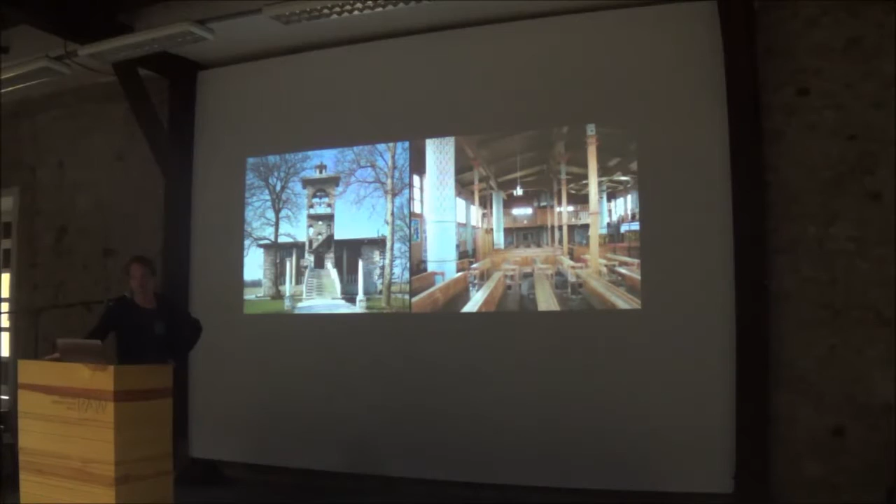So nevertheless, in the golden era of modernism, I'd say this was a very brave act on his part. We can see, for instance, one church with a very limited budget, and the most well-known work, the National University Library.

As you can see, a very interesting texture on the facade. Also, for instance, the pavement—he picked stones from all around the construction site and incorporated them into the pavement. The other thing is he designed everything, from the exterior to the last detail of each house and interior. As you can see here, the main library reading hall, the chandelier—everything was designed by him down to the last knob.

Just a bit more history: we became independent in '91. After this, especially the young generation of architects had some luck that we could enter—there were a lot of competitions. So we had some luck to enter and to start working together with some older architects. Also, when a new country is established, it needs all the infrastructure, administration and institutions important to lead the country.

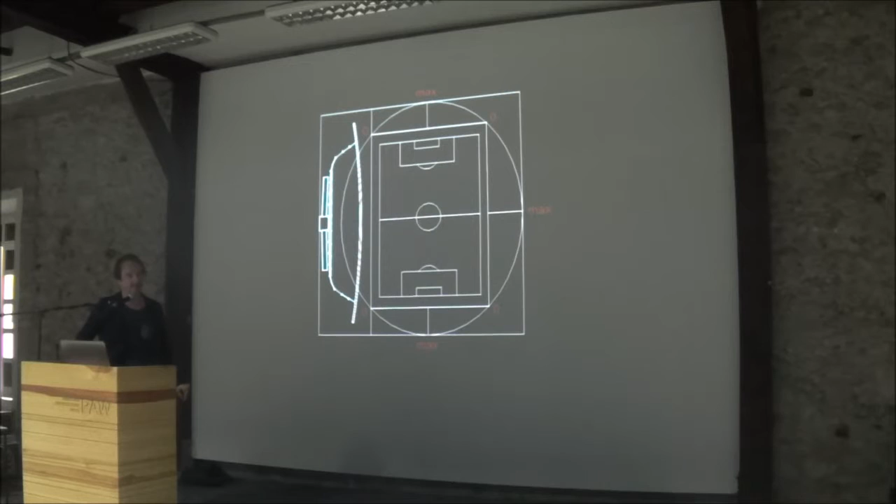So basically this first sketch also became the physical design of the stadium. We started with very pragmatic points, positioning maximum points of seats in the middle of both sides of the stadium, with the corners left without. The next step was that we positioned all the additional program on the base.

With natural architectural elements, we already established a security zone - you probably know football better than me, that you have all these security zones you have to check, so you don't need additional fences.

We didn't even expect that this so-called balcony would also become a foyer of the stadium in between both parts of the match. You can see that they all got together here and talk about politics and I don't know what.

So the second thing inside, maybe I will just quickly mention, is the double transparent roof.

Because of this, our stadium needed really minimum additional lighting, because we kept, you can see here just one point, the existing columns with the lighting. So especially at night, already during the daytime you get this diffused light, but also during the night, during the match and in between, you don't need additional lights, because you get light through the diffused light from the existing lighting columns.

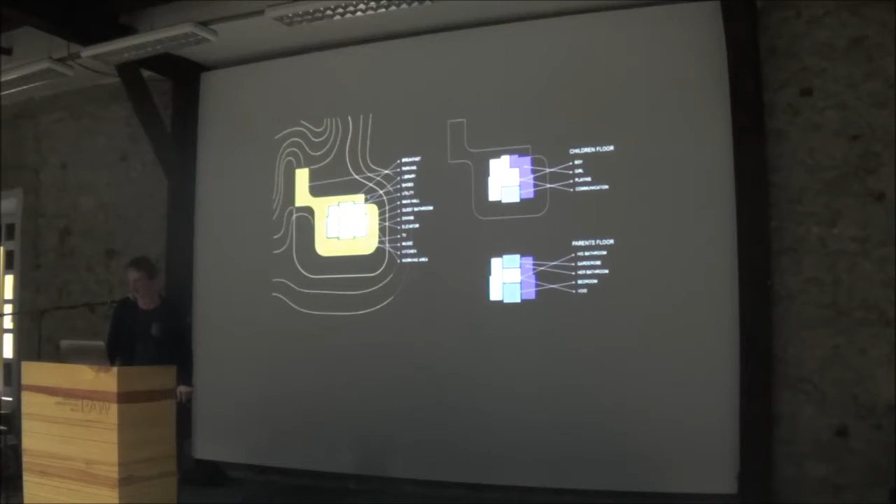All architects in practice know that private projects are quite essential and really interesting, because you have to talk, you have to enlighten the client. So when we started to talk about the staircase, which we said could be the main core of the house connecting both parts, they brought me this image, I don't know if you watched this Dynasty series, it was like really long movies.

Slowly we got to some spiraling staircase which is connecting, and also a visual element which you can see and be seen from all parts of the room. You can see the living room, the children's floor, and then upstairs the parents. So also the different levels of the terrain, we kind of stepped, elevated towards the living room, in between both the first floor and the ground floor.

All the interior is clad in wood, and the main elevation from the garden towards the entrance, you can see the stroke and the vertical connection where you enter this staircase.

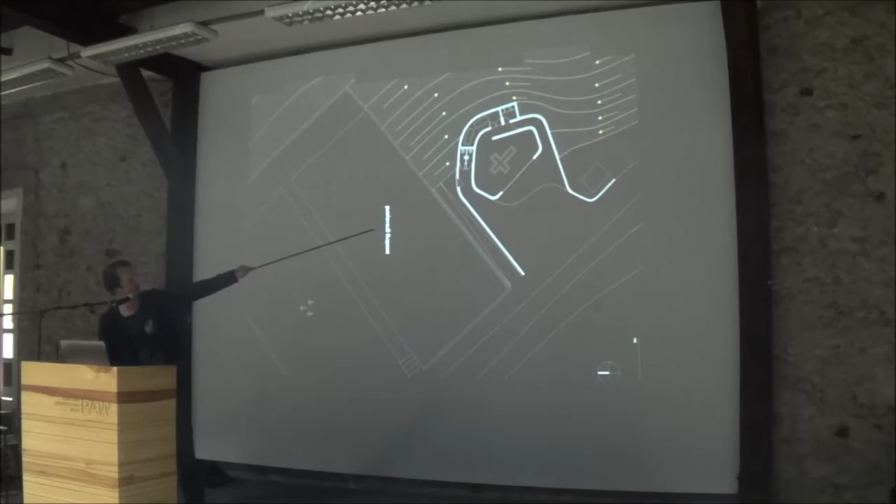So we made a flat roof, hid all the service spaces inside the existing trajectories, plus integrated the way the wall goes from the road to the existing graveyard, plus the square in front of the chapel, so that the memorial can also be held outside when it's warm, plus an ecological island behind this wall.

So you can see the ways of the trajectories, all the concrete shell, and the finished chapel. You can see this connection, the small interior, and the lighting during the night. The sides, both entrances from the sides, and the hidden ecological island.

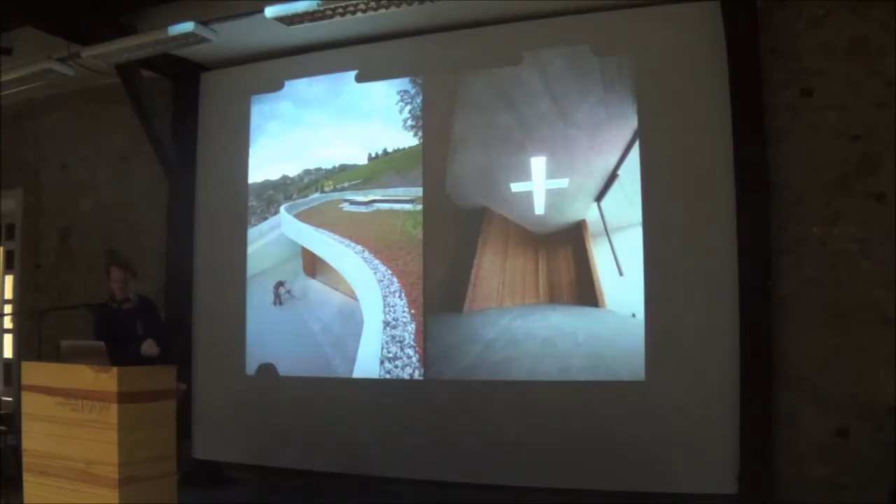And you can see from above that the chapel is integrated into the landscape, so it's on the same level as the existing graveyard, so it doesn't stick out. And still some imagery during construction, and the lighting from above, which travels all over the day.

It's a, let's say, quite more recent project, which first miracle was that it gathered four different Slovene offices to make one project.

The reasons were mostly economical, because they didn't have enough finance to have a proper competition. It was a very interesting task to do a museum for European space technologies, plus a communal space for village people in this small town, dedicated to one of the first rocket scientists from the beginning of the century. He was called Herman Potočnik Noordung, and he was one of, if not the first, scientist who started dealing with traveling through space while taking into consideration gravity.

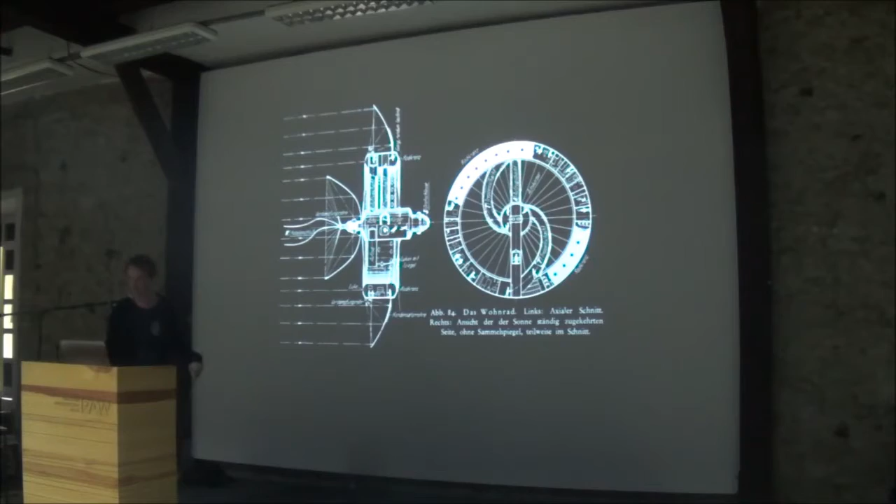He made these space wheel plans, so you can see the spaces and the power of gravity turning the wheel so it can travel through space. If you don't know this sketch, you surely know Stanley Kubrick's movie 2001: A Space Odyssey, which used his prototype to show it, and not just this one.

The museum dedicated to him was built because the mayor was very fascinated about my idea, since his mother lives there. The second option was Maribor, but they decided to do it here because they were really eager, and it was also funded around more than 60% with European Union funds.

Basically, very simply, we took a prototype and incorporated it into the space, and we wanted to have a feeling of dealing with gravity a bit when entering, and also when designing the spaces.

As you can see, the village also has a communal space, where an existing house was standing, so we had to incorporate that. The communal space was positioned in the core of the building, and all around we positioned the exhibition space. You can imagine the exhibition going all around, like maybe the Guggenheim on the ramp, so that you feel a bit more gravity when traveling from the core to the top of the building, which also has a sightseeing roof view.

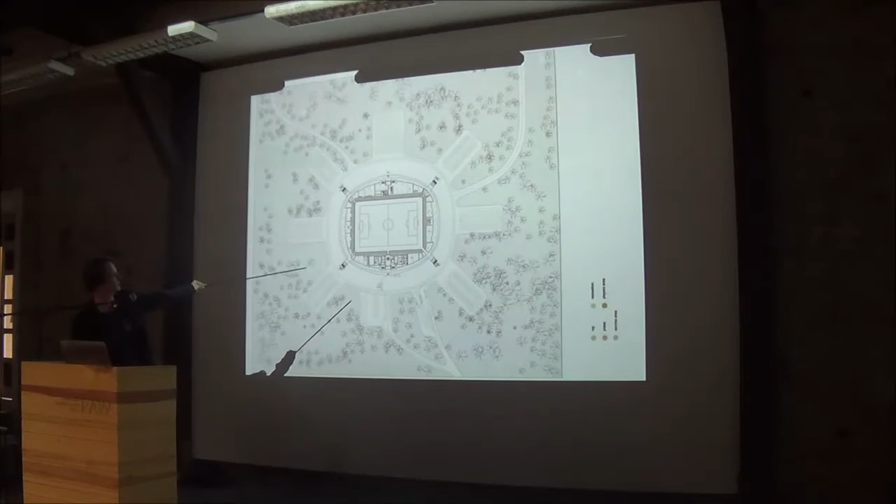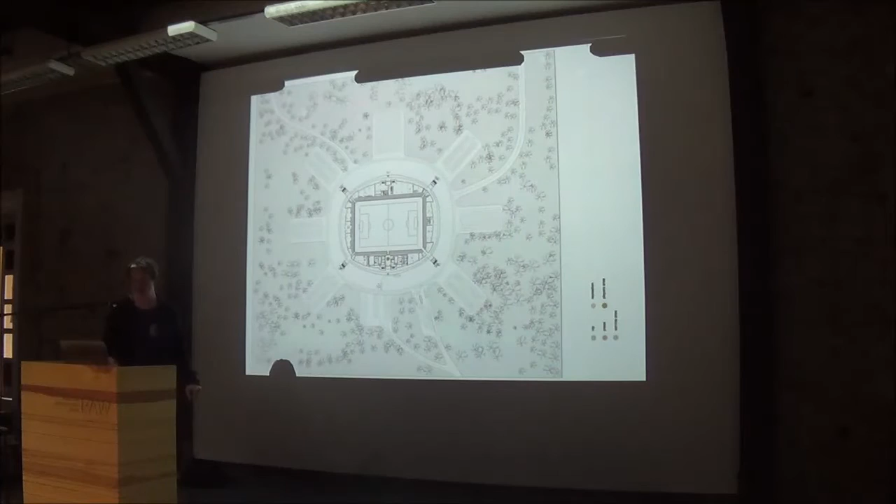So you can see this area. All the additional program for footballers, some additional fitness plus player zones, were placed on the base and ground floor. Then we made this envelope, and we started to do a lot of different tests of this envelope, how a roof becomes a facade, and how we make perforations according to different functions. So we got to this scheme.

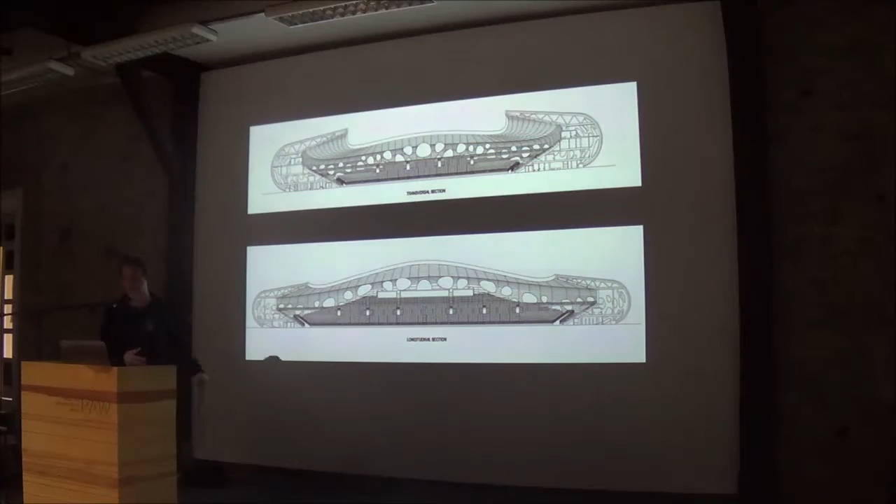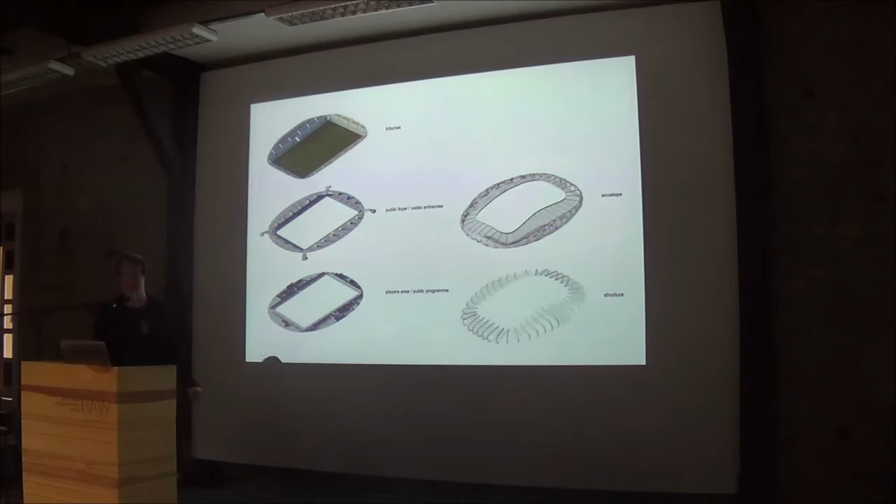We also did a lot of, let's say, economizing of the structure, because before, when we went to take shots with the photographer, we got to know this Borisov, where this stadium is placed, and it's really, I could say, from the 70s or 80s in former Soviet Union.

That's why this stadium now is really kind of communal, or like you would say, iconic - I don't like this word quite much, but it became also a space to meet. Maybe it's better to show the video.

Also the perforations are open, but they have different functions, and they connect all the spaces and all the visual lines inside different program rooms, plus the interior is completely exposed, so we didn't hide any structure.

Some night view, and maybe it's best to show the video if it will work. As I said, it was kind of funny to show this video because, as you will see, there are funny moments which we experienced when we did this one week stay in Borisov.

You can see the site, which was completely just pine trees. All around they made all the new infrastructure, the roads - this is all new.

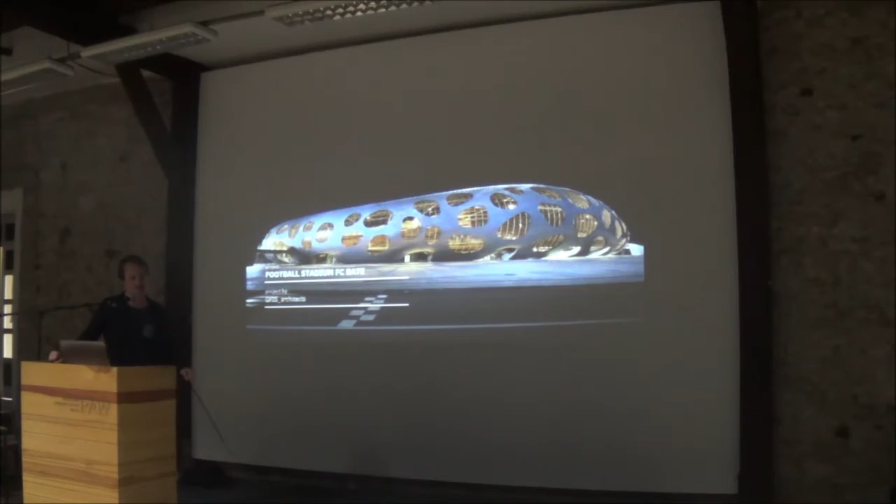Also, we collaborated on all the project with the engineering company from Lithuania, so we had to deal with a lot of meetings which were held sometimes even between the countries, so it was kind of tense. The project lasted for 3 years, and in between it was even put on hold because they had a huge devaluation.

So the length and the width and the height. In all these years we collected a lot of these data in different heights and widths, more or less for housing, and more or less social housing. That's why I will start with the first one, which was our first ever project.

It was actually in '97, a competition done after the urban plan competition by the architects. It involved different typologies, from atrium row houses to 3-story houses, and gathered around 5 to 6 groups of architects. The special thing was that they first wanted to do a really expensive neighborhood, mostly for diplomats.

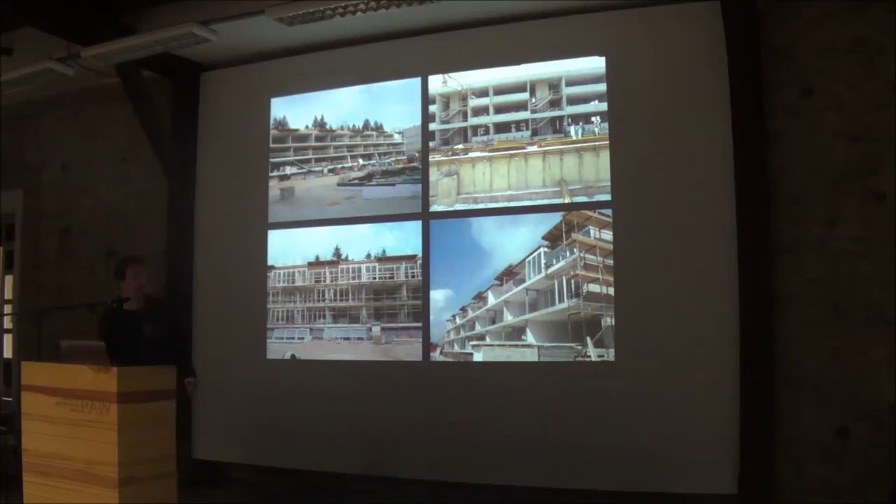Over the years the investor changed at least 3 times, which meant each new investor had to cut the budget. So the last request from the client was that we had to use the same, cheapest material on the market, and all the levels should be the same. So secretly we made a shift in the first floor, which even on the construction site, from the rough construction, was not seen.

So then they were a bit surprised when they got these shifted elements and balconies on the facade. And this is the very clear organization of space: living spaces towards the west, the core in the center, and the entrances and sleeping rooms towards the east.

So years ago, during the study, after we went, I think in '98, during the booming, we just decided to go to London to do a graduation at the AA. After that, mostly what was our first impression was that we lost all the competitions. Before we had luck, and then nothing went okay.

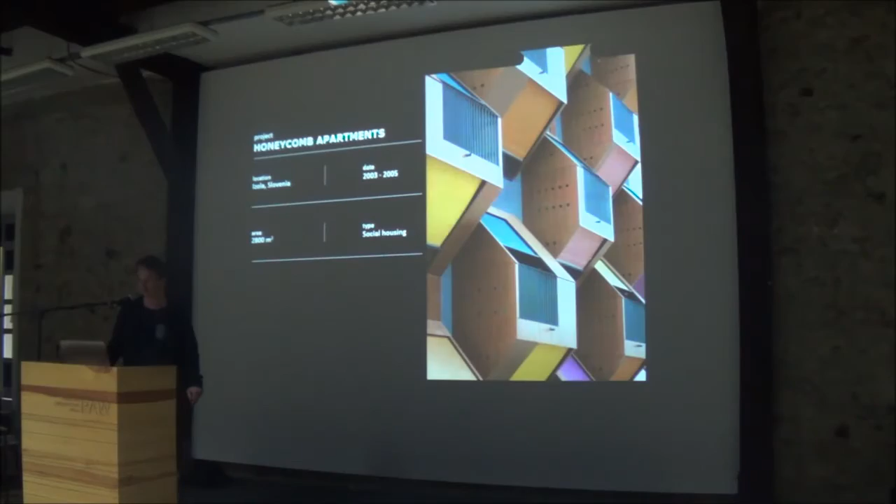So the first one we got was 3 years after we came back. It was social housing, also in the Mediterranean area. So low cost, held by the Slovene Housing Fund, a state-established fund which helped young families afford their first apartment.

So these are 2 plots redefined. The first building was done by the fund, and the second was then commissioned also to us, but that one is from the community of Izola, and they are renting to social case families.

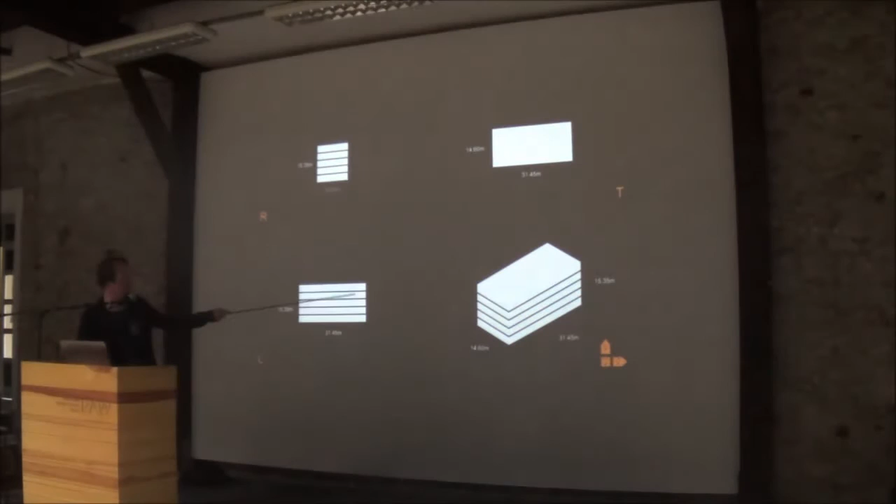Here are all the fixed dimensions of the buildings, and we never even experienced that we had in the contract that we had to stick to the brutto square meters, not just of the selling area, but also the brutto. So all the hallways and services were included into the price, which made it even more difficult to have the budget.

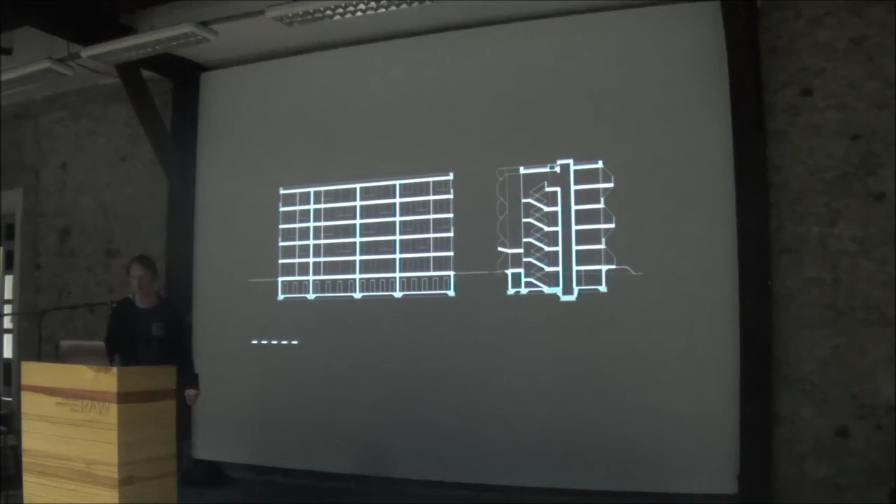You can see this is the basic principle of horizontal vertical slabs, and we used a minimum amount of halls, entrance, and staircase. The only thing we incorporated was this element, a balcony, which also stands for the room below, and at that time we didn't talk so much about

the sustainable element, because during the summer, especially when the shades are down, it helps reduce the heat inside the apartment, because the warmth accumulates inside the balconies, and then the east and west winds blow through these perforated sides out.

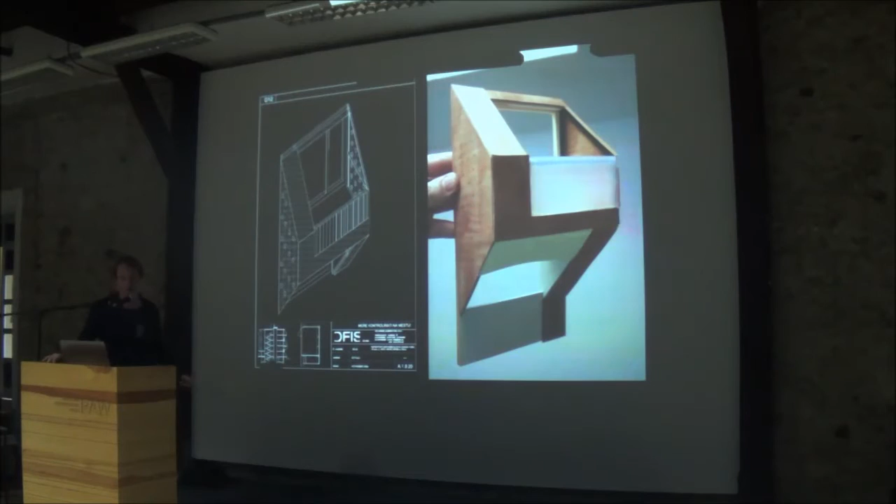And the same goes during the winter, just with the change that it helps heat the interior, because the winters on the coast can also be pretty hard. So you can see this bare

construction of the building, and you can see the first element, which was kind of, let's say, the prototype. And then we also chose the colors, which were kind of

Mediterranean, not to mention that people, especially Slovenes, really like to make things colorful and decorate their balconies with all kinds of crap. So we wanted to give them that from the start, and also the colors of the interiors were different, and surprising.

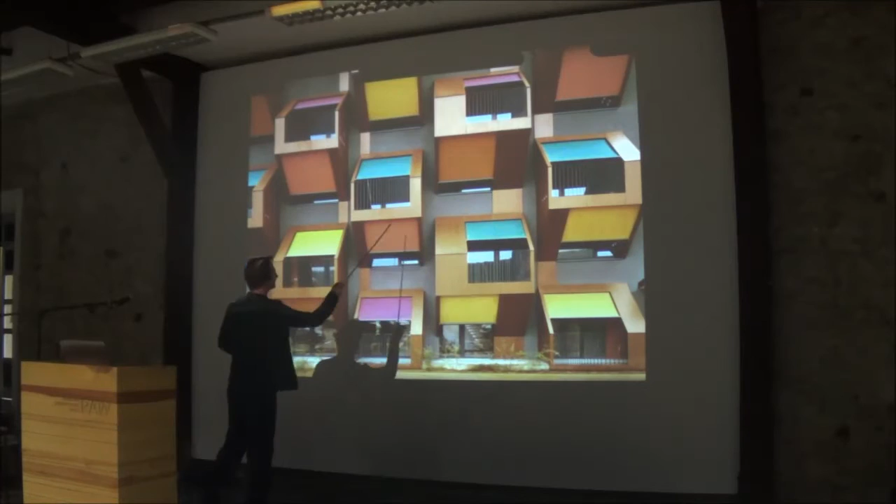And if you can see the vertical shift, it kind of diminishes the scale of the building, which you will also see in some other projects, because as you can see, one apartment is held, for instance, here, so it has a room and a balcony and another room, so it kind of diminishes even the feeling of the floor.

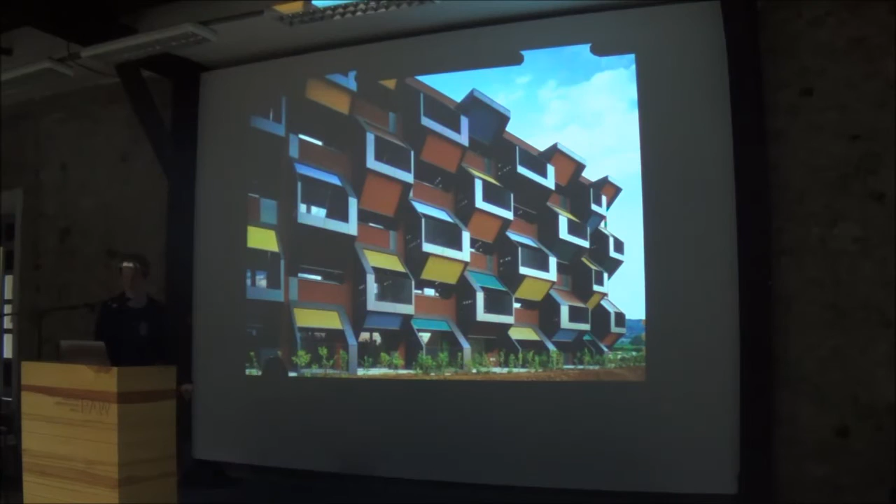So we also took into consideration the 1.5 meter balconies out from the facade, and some shots from the apartments before the inhabitants came in.

After this competition, we got an invitation from a private, fast-growing construction company who also held a competition, and later they sold it to the Slovene Housing Fund. Also here the urban plan was fixed.

It's very near the city center, with more or less 140 meter long slabs, 4 floors high. This was an existing slaughterhouse area, and their only request was how we fulfill the slabs, all the volumes, with the program.

We delivered the competition on just one A3 paper. We took a lot of consideration to make a mathematical plus-minus calculation. All the program they wanted we incorporated into one module, around 30 meters, which is also the area where the fire shafts had to be because of the fire law.

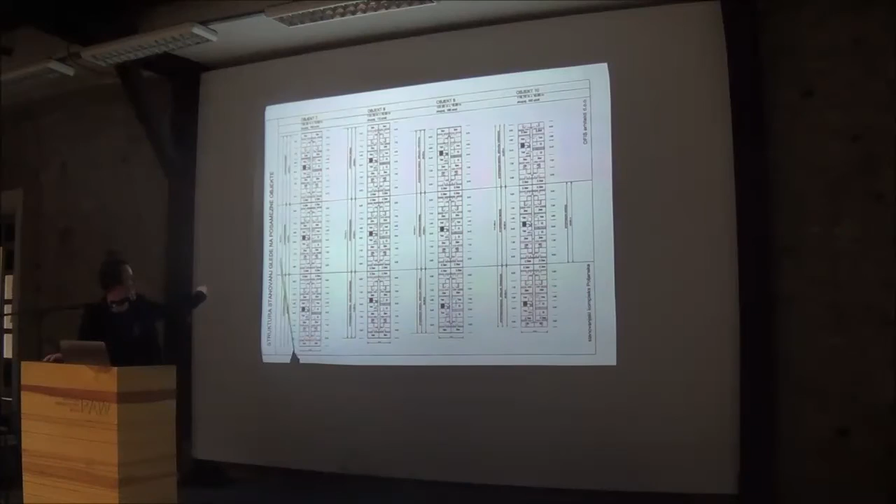Each floor is also the same, which makes for a faster building process, because all the projects plus realization had to be finished in 2 years. Practically it meant one apartment a day, because 650 apartments are inside these volumes.

With the 1.5 meters on the first floor, we gained another 50,000 square meters for investors to sell, and also the construction and the drawings for permissions were quite a lot faster, because everything is done with models.

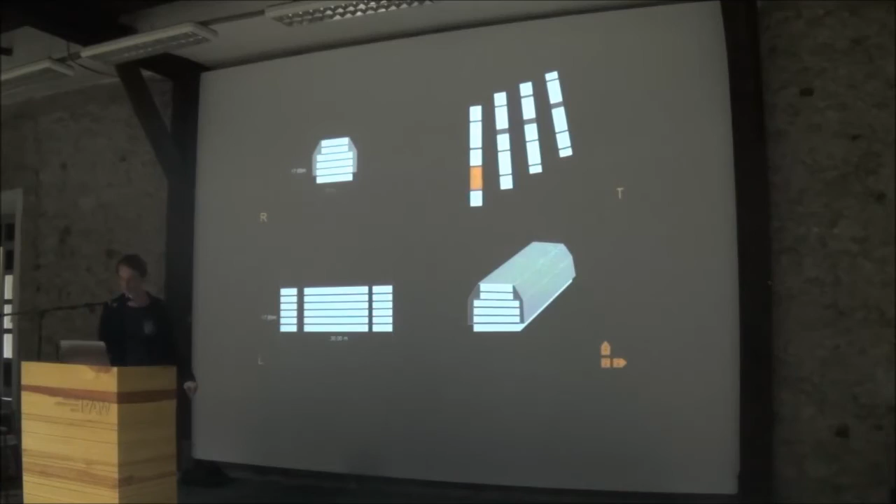In comparison to this, we wanted to completely diminish all the rigid, bare slabs, horizontal and vertical. So we layered all the facade into the plaster zone, which is the basic living and interior spaces. Then we introduced these loggias in the 1.5 meter area, in combination with open balconies, giving us a fence layer of the facade.

More or less here we even got to 650 euros per square meter, because this was also sold to the Slovene Housing Fund.

What is special here is that we made a sort of very diverse set of habitants. I didn't mention that the top floors we used for duplex spaces. Basically, there was a lottery you could apply to, and the most social cases get apartments, and then the leftovers are bigger apartments plus more or less all the duplex apartments.

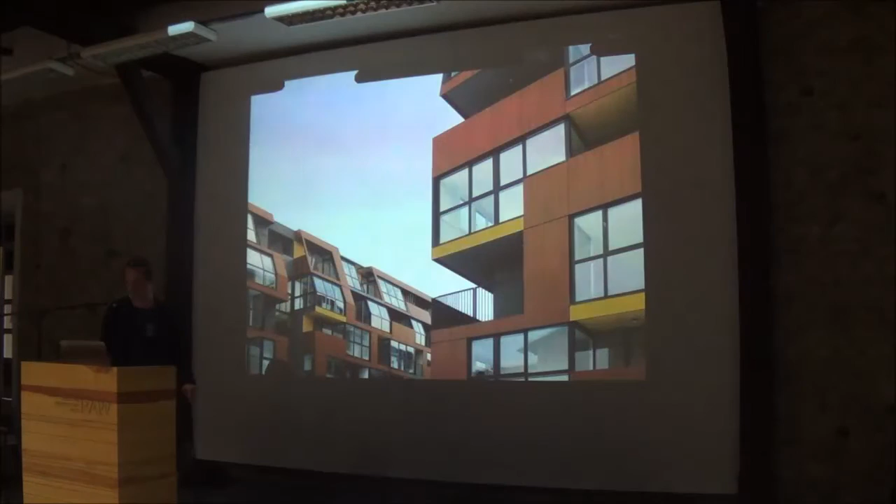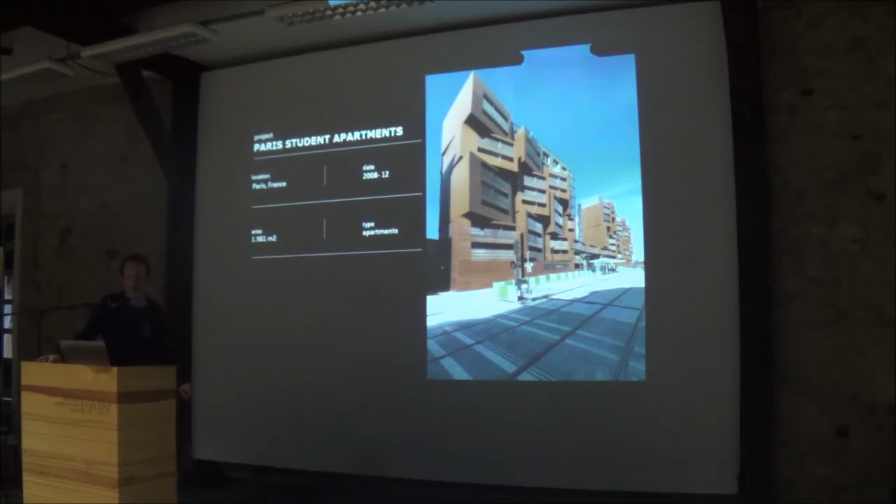One of the top apartments — and I will continue with, 3 years ago, I think the first project we did abroad, which luckily was very exceptional, and by luck, more or less, we won an invited competition in Paris for student apartments, I think around 182 units.

I don't know how familiar you are with Paris, but more or less you know the Parc de la Villette. Also in the vicinity now is the Philharmonic by Jean Nouvel, though I think he's not the author anymore, I'm not sure. So I will go back to this scheme of all the exercises we did for 10 years.

Basically we got to the same exercise. In this case we had 2 volumes, maybe very special compared to others, just 14 meters in length and around 12.5 by 12.5 meters in width. Both blocks had to be student studios, single studios.

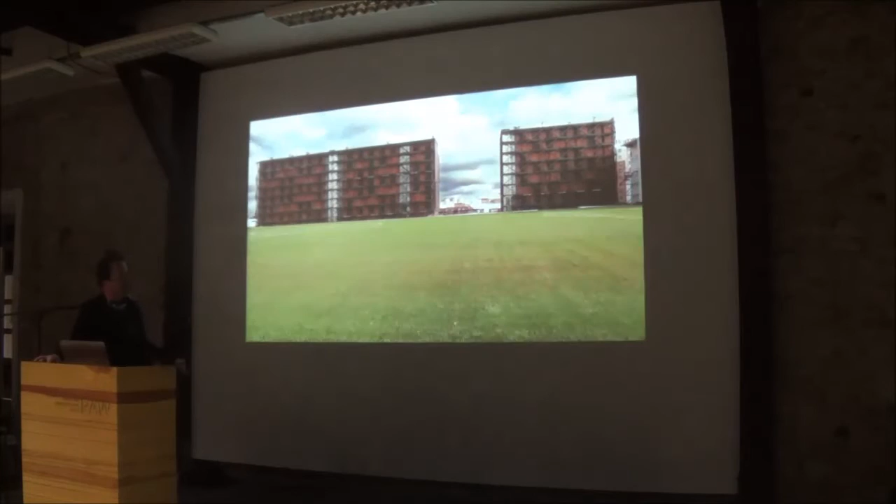So these are two exposed communication shafts with elevators and staircases.

This is the middle space and the connection in between, on the first floor, between both buildings. Fencing, and this is, I think, the backyard, which we also designed. And the main entrance to the building.

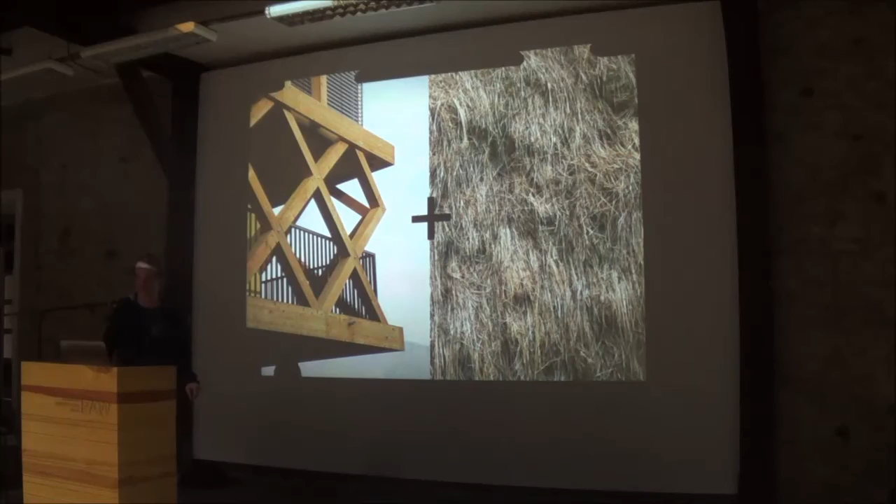Maybe I went too fast. So I wanted to show you these so-called hayracks.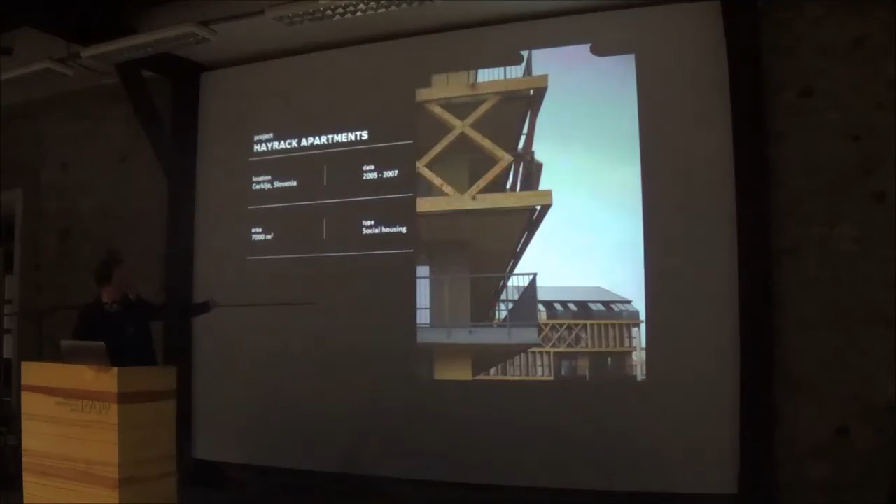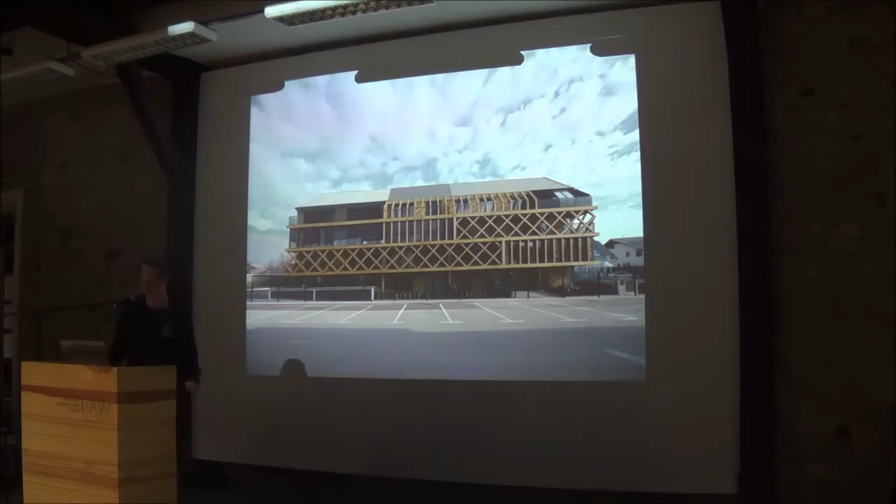So we used in this case a kind of first level of entering with the balconies, and basic external elevation as a kind of first shading zone. So next, what we did, is we hide all the elements like chimneys in this pitched element, which is flat in the middle. So you don't see any exposed ventilation and any shafts. So this is the balcony, and I will show this in the next project.

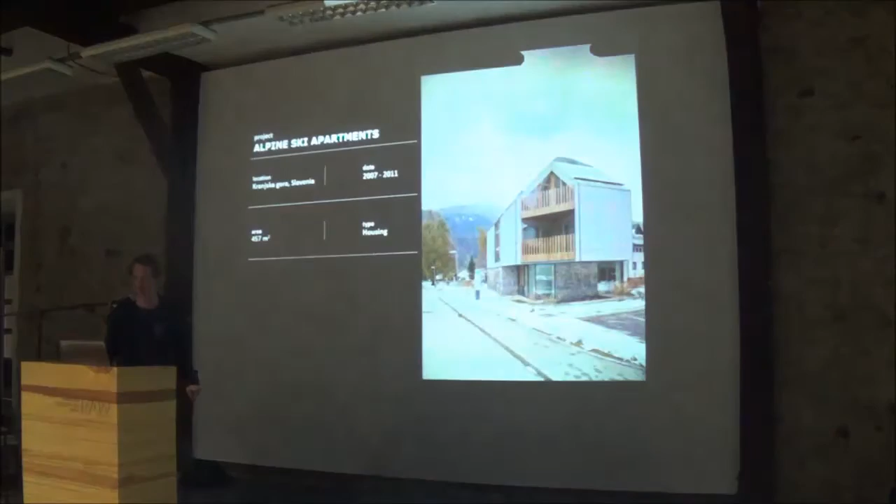Which is 8 small ski apartments, also in a beautiful environment next to the border to Italy, called Kranjska Gora. If you know, they hold the world championship, ski championship, World Cup every year. So the village lives also during the winter and also the summer. This was a very small spot. And what was the main special position of the building? That they had the best views on the corners.

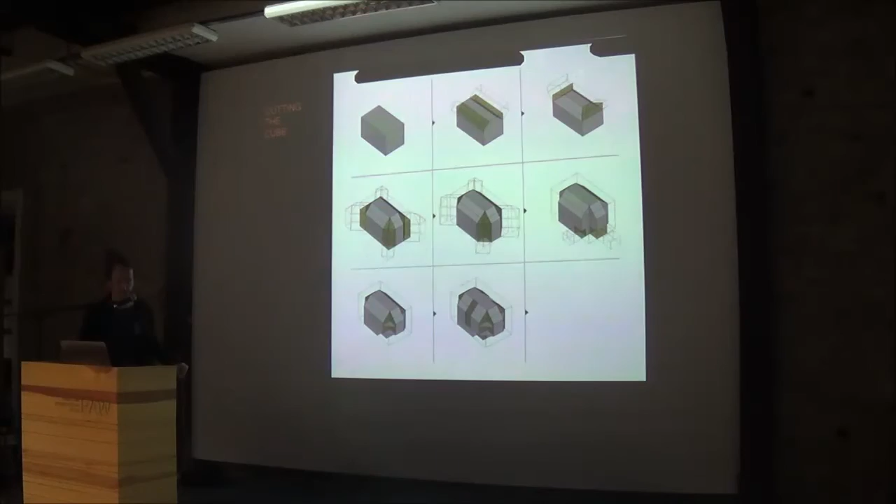So we started with cutting the cube which we had prescribed in the urban plan. So we cut it in the vertical for establishing the roof, and also in the horizontal and vertical cuts. And where we did the cuts, we positioned the balconies plus all the glazing for the interior spaces. So you can see already a result, the cut diagonal balconies and the glazing, and typically the stone and the solid base on the ground floor, and they used concrete slates as also used for roof elements, which we take now to the facade.

So in this case we just use two materials, wood and these slates. So we did the finish all just till the first constructions also. It means that it was just bare walls without even, as you can see, without the finished paving on the floors. So very small project.

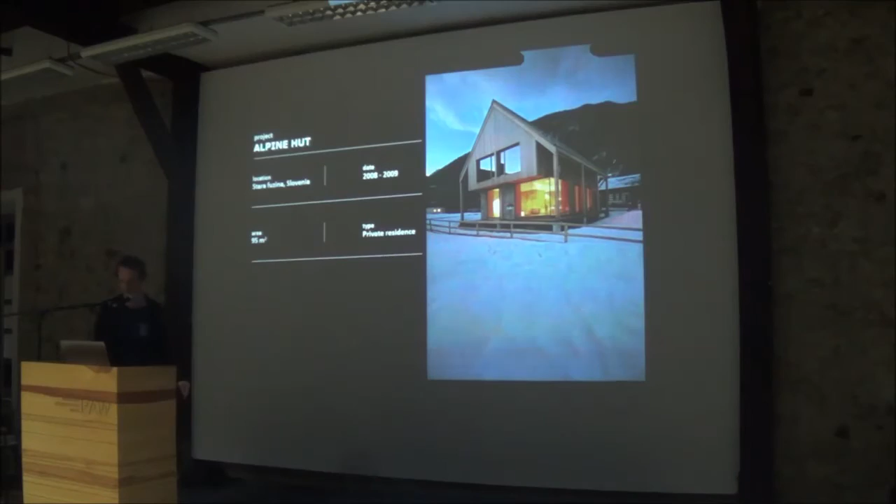Which if you're going from Bled, there is also, I want to make a little trip on the Alpine area. It's called Bohinj. It has a really beautiful lake, and it's a kind of corner which is just continuing with the mountains, which you can also reach the highest, Triglav, from here. So this is a very small village next to the lake, and this is the project which the client already bought together with the building permission.

So more or less this was the elevation, so the client asked for some sort of redesigning. So what we did is the frame which goes around, a continuous stroke from the roof to the pillars, which holds water and is collected underneath, and also the space in between is used as a veranda.

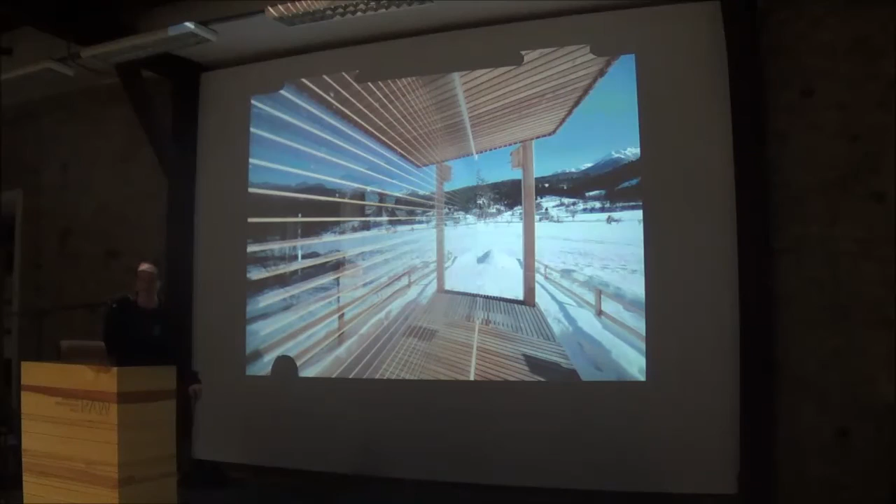So this is already designed using the same elements and the same materials, the wood, the larch, and the stone as a solid base. And one glazed side towards the south, which is really a good collector, especially during the winter, so it really helps to heat the inner space, to reduce the heat loss in the interior. And the top floor, it's together around 55 square meters.

So maybe I will not show the video, maybe if somebody will have the opportunity to see it after.

So the last project, I will just briefly go forward. It's just with one basic concept, that we don't do nothing from the outside. So it means that we have to make some sort of example which would encourage the owners of these buildings, which are now slowly collapsing, that they can live also with another function.

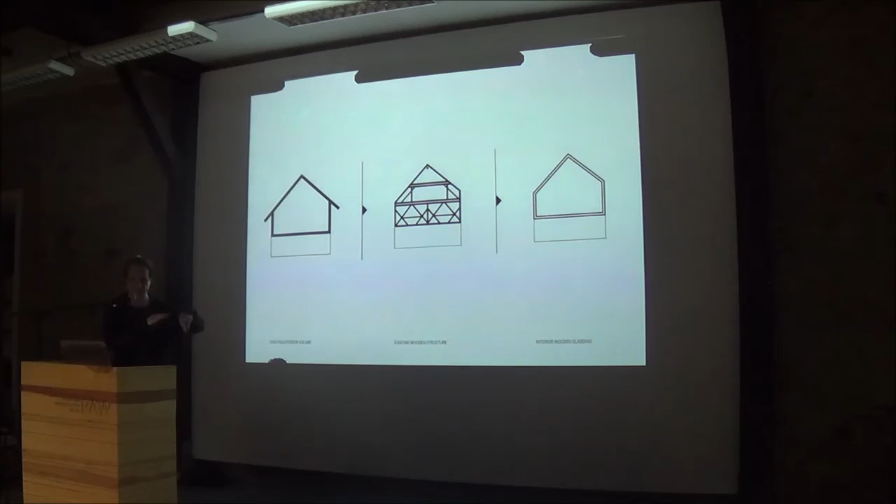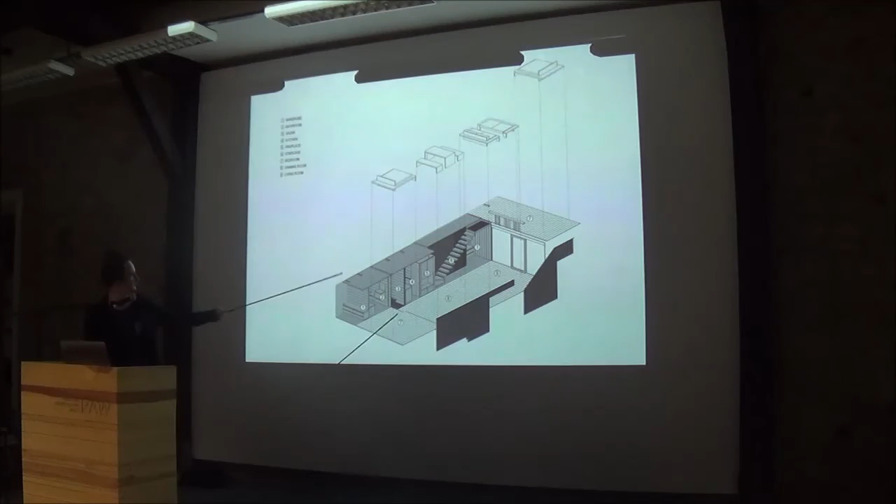So basically you can see that we kept all the exterior and all the internal construction. So all we did was an inner shell out of spruce. This is the wood which was used for all the elements of the interior, for the walls, floors, and all the furniture inside.

So you can see existing and the new, which was also all that we did, is opening the interior towards the outside. But basically all the slates, also the existing, were reused, and all the wooden cladding was just left like it was. So you can see existing and the new porch, and some, let's say, before and after intervention.

And I will just finish that we also continued with these topics in fall term. And just last week the book was printed about the studio we had with GSD, Harvard students, and also because I don't like to travel, we made a study trip to Slovenia, of course.

The topic was housing, or especially habitation in extreme environments, and that counts inside the Slovene Alpine part, that's why students came here. And we, like I showed you, elaborated all the architecture and conditions of the Alpine area.

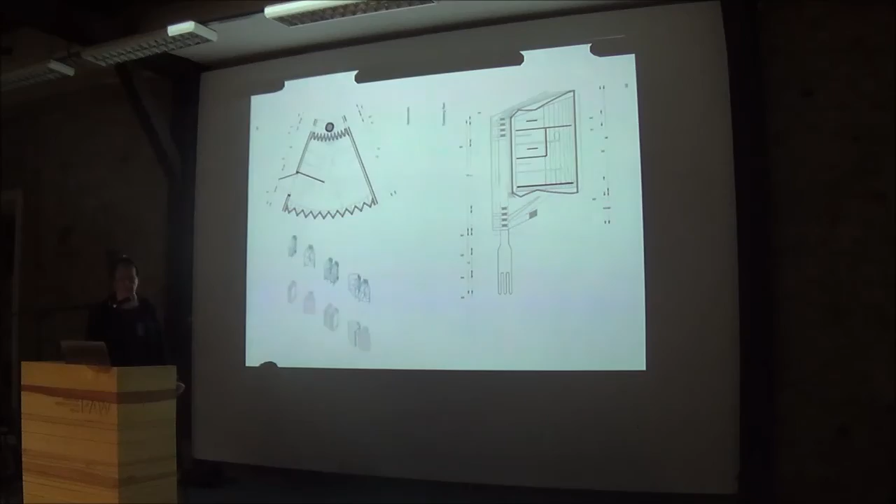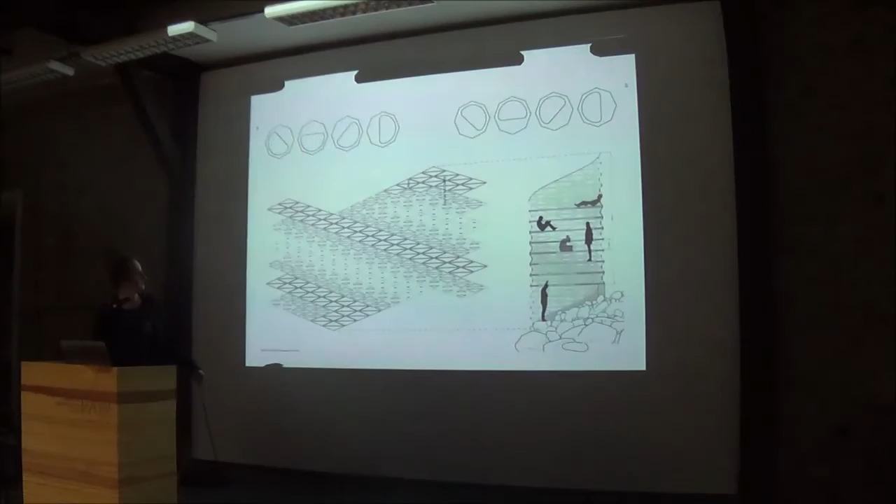So just some brief student works of different concepts of living in the shelter, or to spend the night. The last one I will show was put, and will be put, on the site this summer, so it's 1 month old photos. Thank you very much, I'm finished.

And if there are any questions, I will be really glad. I hope I was not too long. Just a second, we are reading. Okay, so maybe we can show.

I would like to know, how would you work here in Pristina? Do you have any idea what you would start with? Give us a clue, or give the students a clue, what would you do here?

Maybe I was thinking about this when we drove together by car from the airport to the city center. What we both noticed was a kind of feeling of unfinishedness, which in this case maybe we could take as an advantage, especially comparing with Vienna, for instance. You go there and you don't have any feeling or even wish that you could add something or take something away. Everything is already there and it's really perfect, maybe too perfect.